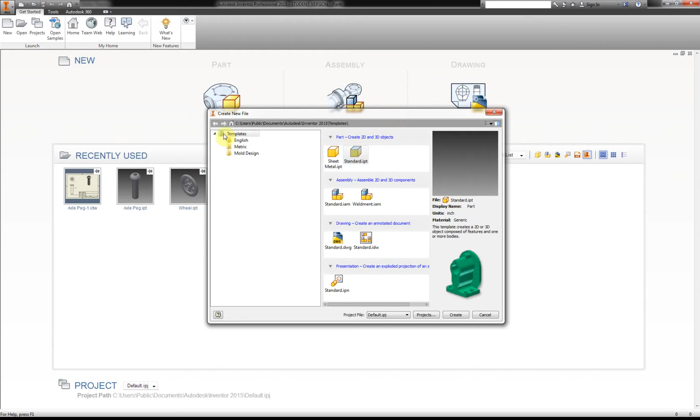So what we're going to do first is make a shape that we're going to be cutting all of our other features out of. So in Autodesk, make sure you have a standard part file, a new standard part file. And we're going to start our 2D sketch on the YZ plane.

And we're going to add in a rectangle. I'm going to use a 2-point center rectangle because I want it to be centered on this.

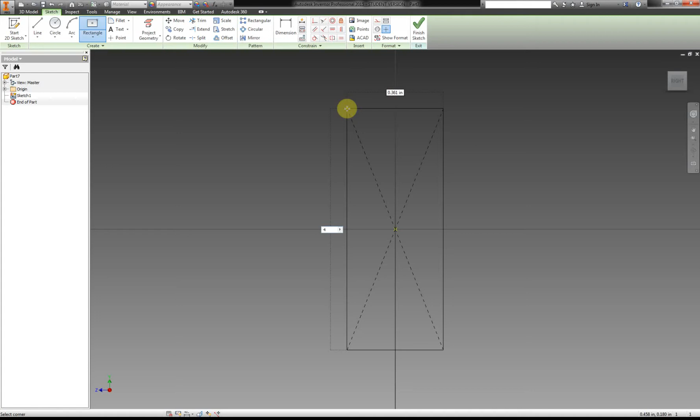So for the height, I'm just going to add in 4 inches. And then for the width, I want it to be 2 inches because that's the exact dimension. Alright, so our width right here, and our height, I just put something in as a placeholder because we're going to be making this arc right here.

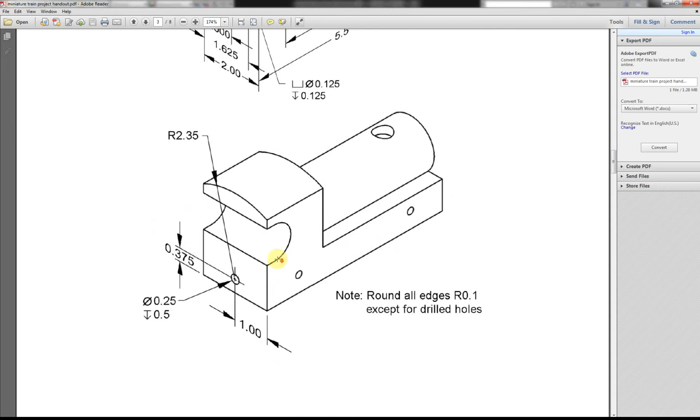So we're going to place an arc, and I'm going to use the center point one because I want the center point to line up in the middle here, to there. And just to double check that it's in the center.

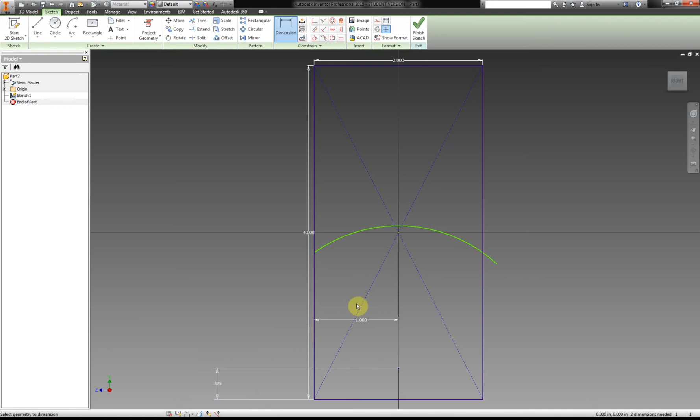And from the bottom, we want it to be - let me just double check that number - yep, 0.375 inches from the bottom. And we want the radius for our arc to be 2.35.

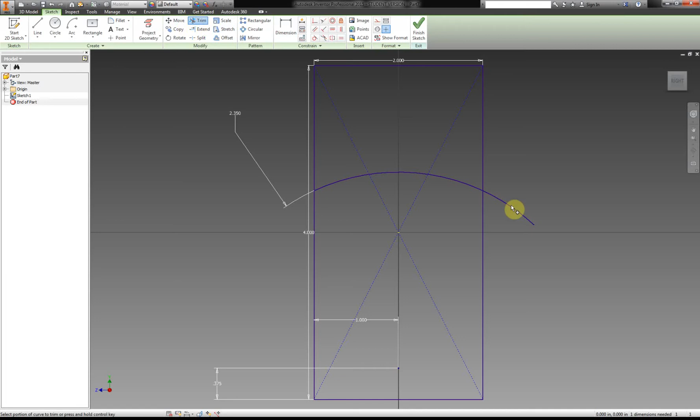Alright, so we can see here that it kind of extended off to the side, so we can just use the trim tool and trim that up. So we can see here that 4 inches was more than we needed for our rectangle. So we can finish our sketch.

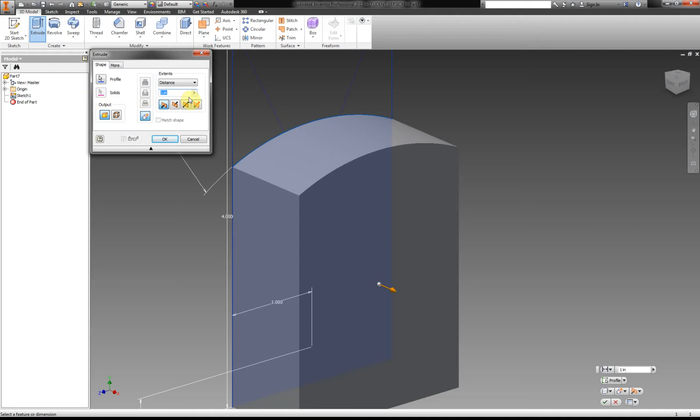And we can extrude this section. For this section, I'm going to have it be 5.5 minus - actually, nope, it's just 1.75, because we just want this one section right here. So if we just follow the line down, 1.75.

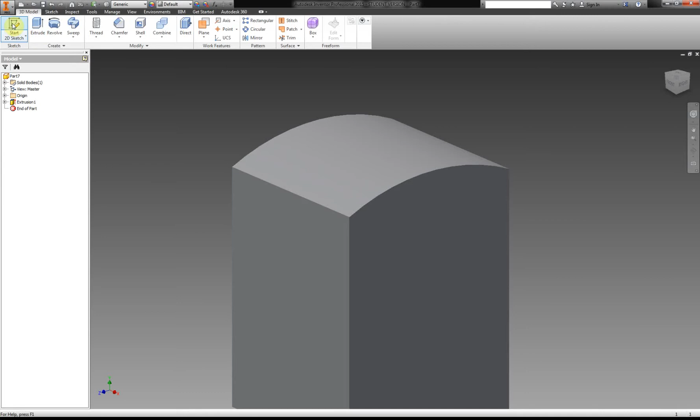Our next sketch we're going to place right on this surface here, and you need to make sure that you use project geometry, and we're going to use a rectangle. This time we're going to use the 2-point rectangle. Make sure you click on this bottom edge right here and then click on this edge right here.

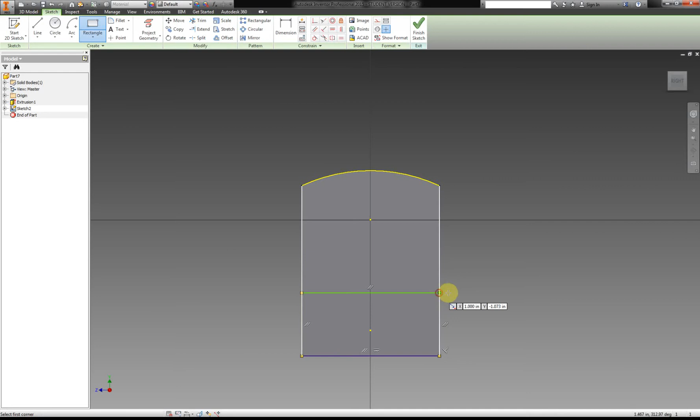So the height of this is going to be 0.88. If we follow the line out, yep, 0.88. Then we need a circle that's going to be on top, right in the center, so it's 1 inch away from there, and it's going to be 1.38 from the bottom.

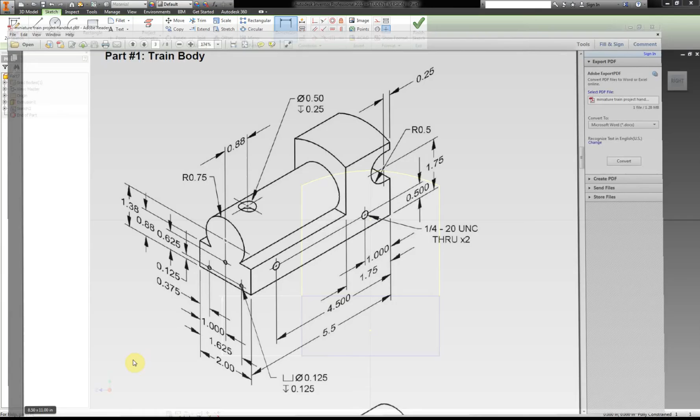So our circle tool - 1.38 - and from the edge, it's just 1 inch. And our radius is 0.75, so we're going to need to double that, so times 2. Yep, so we have 0.75 times 2, so now we have 1.5.

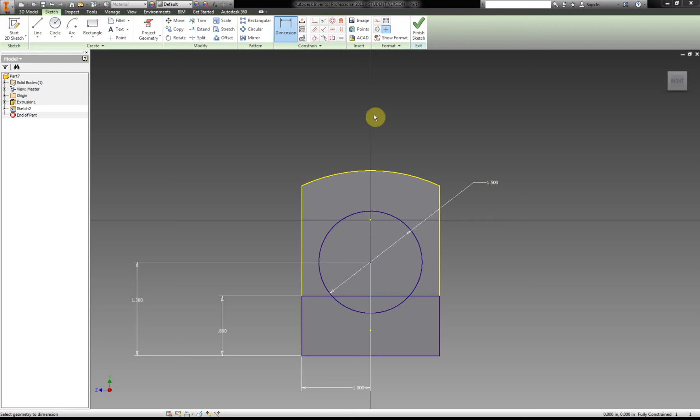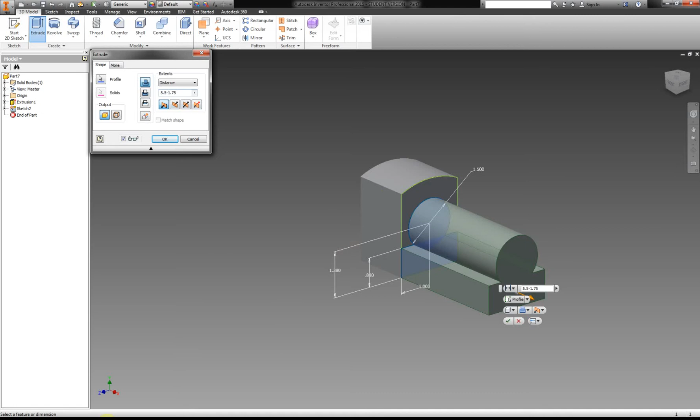So we can finish our sketch and extrude. Make sure you click on both sections before you change the distance, because sometimes it will only select the second part of it if you do that. So 5.5 minus 1.75 for this section, and then okay. So that was just this section right here, because it doesn't give us the exact dimension, but we do know the total length of it is 5.5 and then minus the length that's right here.

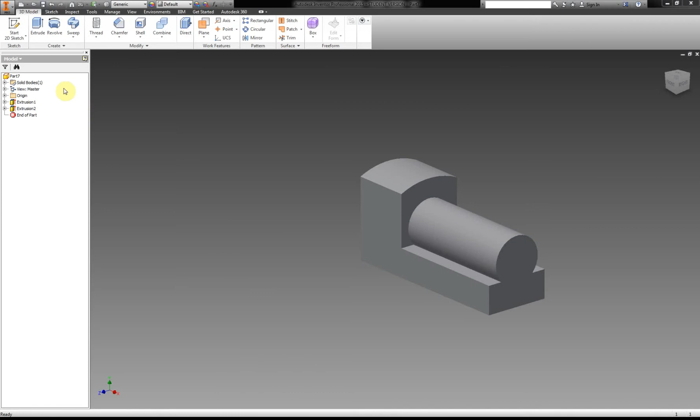So for our next part, we can cut out this section. So if we start a sketch right here, make sure you project geometry.

All right, remember the home button on your keyboard will zoom in and out for your entire object, just so it fills your screen.

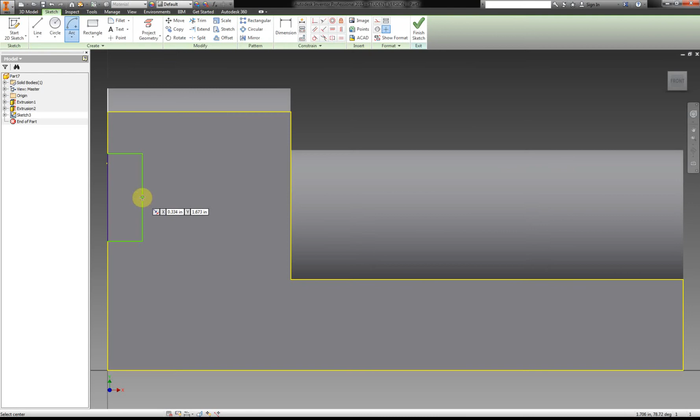I'm going to place a rectangle using the 2-point rectangle, placing the edge here, and then kind of place it here. Then I'm going to use the center point arc because I want the center of the arc right in the center. Yep, see that little green dot? That's what you want to see. The center of this one, so you want the green dot, right there, and then, yep, green dot, right there.

Okay, so now to find our dimensions, we know that we want a radius of 1/2 inch, and our radius from the edge is going to be 1/4 inch.

So that rectangle you want to be 1/4 inch for its width. And then we need to know the location of where this center mark is, or our center point is, to the bottom. So from here to here, we need to figure out that dimension. And if we look over here, we can see it is 1.75.

And I actually got really close. Okay, so now we can finish our sketch and extrude. Remember, you've got to click on both sections first and change your distance to all, making sure it's cutting through your entire object.

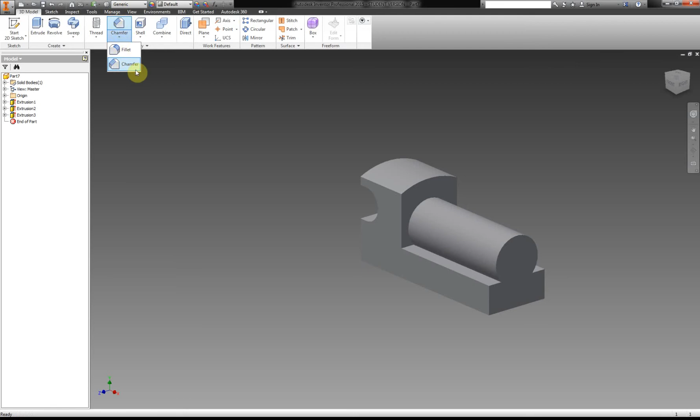So right now we have all of the different features added except for all of the holes. So right now is the best time to add in your rounds and fillets. Remember, the fillet tool, if you just used the chamfer recently, is underneath there.

And for this one, we have round all edges to a radius of 0.1. So except for drilled holes, that's why we're doing it beforehand, because then we can use the all rounds and get them all at the same time.

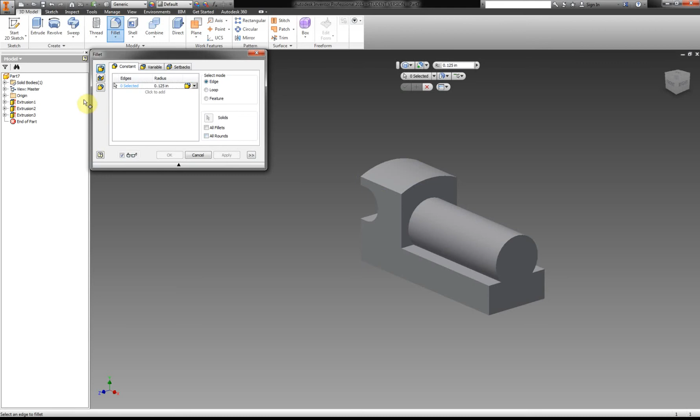So if we just change this to 0.1, select all rounds, now it selects all of them. And then if you want to, you can select all fillets. I think it looks a little bit better adding that in, but you don't have to. Just make sure that you do have all rounds added, and then you can click OK.

So that gets all of this done all in one step, so you're not just clicking on all of the different edges to add the fillets in. And also when you do something like that, sometimes the fillets can look a little weird, like right here. Sometimes you'll get a point, even if you do add in the fillets everywhere. It's just because of how they layer.

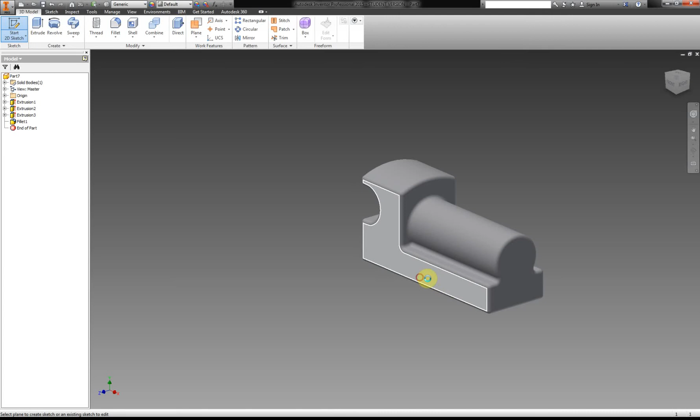So the next thing we're going to do is add in holes for our axle peg right here. We're going to have one hole here and one hole here. So we're going to add in points, and also make sure you project geometry from this outside edge.

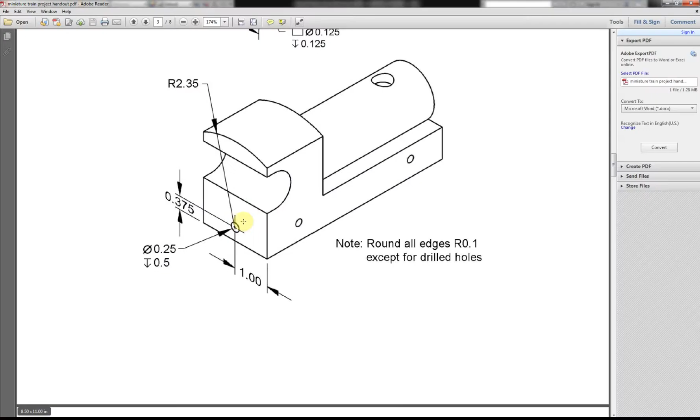Remember, when you're dimensioning, you're doing it from the outside edge, not from this inside surface, because when we go back to our drawing of our object, we're going from the sharp edges right here. We just wanted to round all of the edges earlier just because it makes it a little bit simpler for us. So what we want is from this back end, this one's going to be 1 inch, and this one's going to be 4.5 inches.

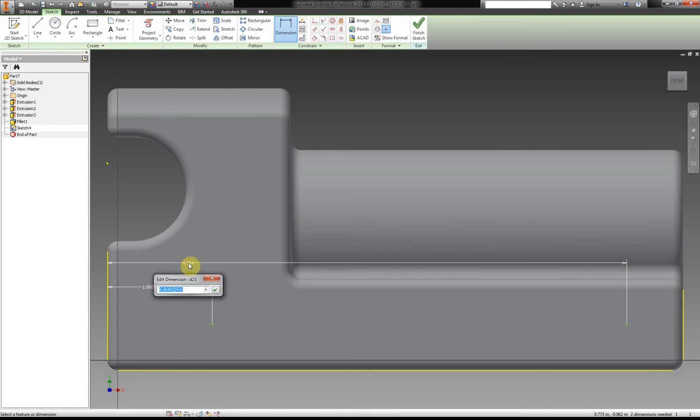So that one is 1 inch, and from here to here, 4.5. And the height of these, if we follow this line out, is 1/2 inch for both of these.

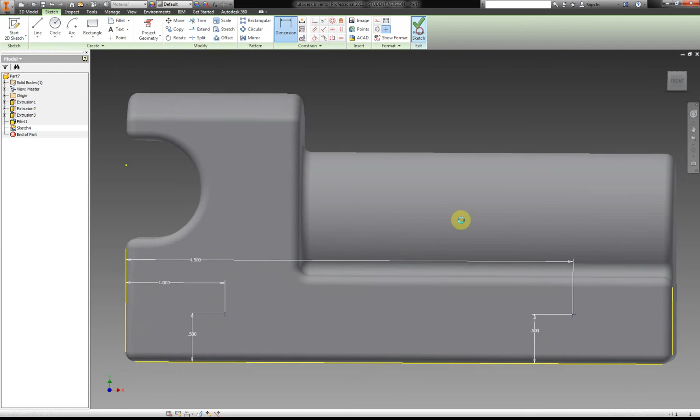So the reason why we want to do just points is so we can use our hole tool. Remember, if you used thread recently, it's underneath thread. So it finds both of those, and we want to make sure the distance is through all.

We want to make sure that we select the thread, and also make sure the depth is at full depth. If you haven't used this recently, it will most likely be unchecked, and this is what it's going to look like, and it won't show the thread going to the full depth. That's the representation of thread. So thread to full depth.

And you're going to make sure it's 1/4 inch, 20 threads per inch, and coarse thread. So we have 1/4 inch, 20 threads per inch, and coarse thread. Then you can just click OK. The next one we're going to do is the holes for the Cowcatcher.

So again, you're going to project geometry to the outside edge, not just this face right here. We're going to need 3 points, so I'm just going to place them anywhere for right now. Just make sure they don't link up to anything so you can move them around freely.

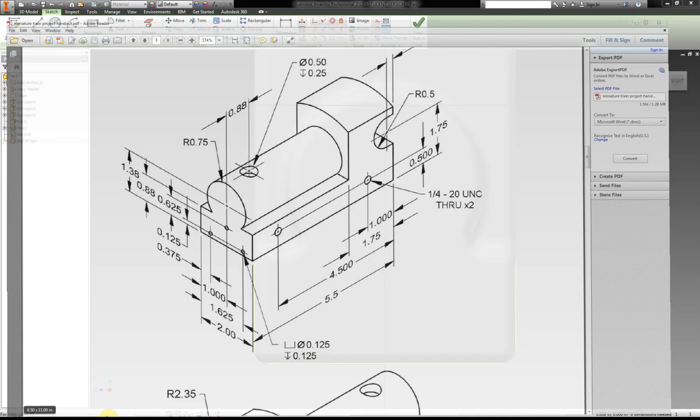So looking here, I know there's a lot of lines and sometimes it gets a little confusing, but if you just follow the lines out, so I want the height of both of these, follow it out. So that is 0.125. Remember that's from the very bottom edge, so it's going to look like they're right on the edge of the fillet, or the round, and that's where they should line up.

Okay, and now for this one, this is going to be 1 inch from this edge, and this one's going to be 0.625 for the height.

Alright, so for here, for this one, if we follow this line down, we have 0.375. Then our next one, if we follow the line down, we have 1.625.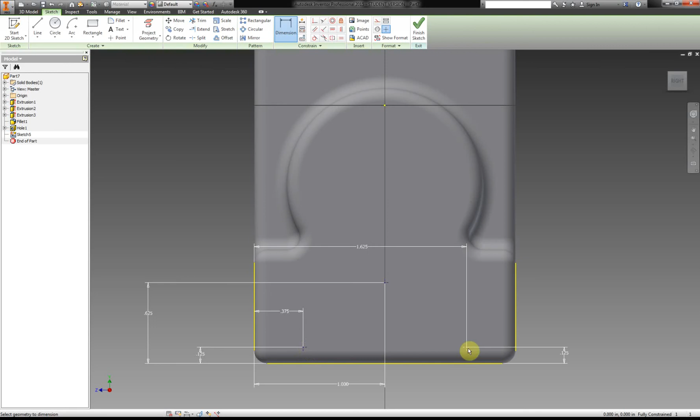So now all of these are blue, so we know we have all of these constrained. You can finish your sketch, use the hole tool. So these we're not having all through, they're going to be at a distance, and they should not be threaded.

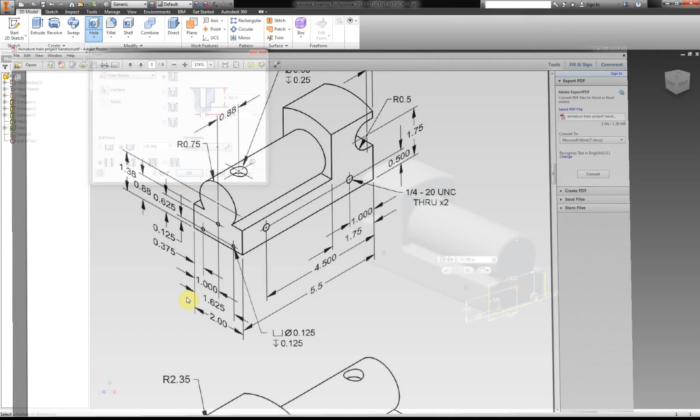So if we look here, here's the symbol that you normally see for counterbore, but this is also used for just a flat bottom in the hole. So the diameter is 0.125 and our depth is the same. And for our tool right here, if you look, we have a point and we also have flat bottom for the drill point. So you can just check or fill in the little dot for flat, and then OK.

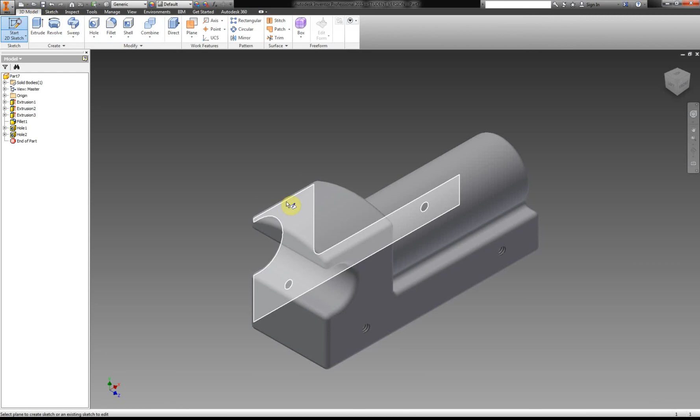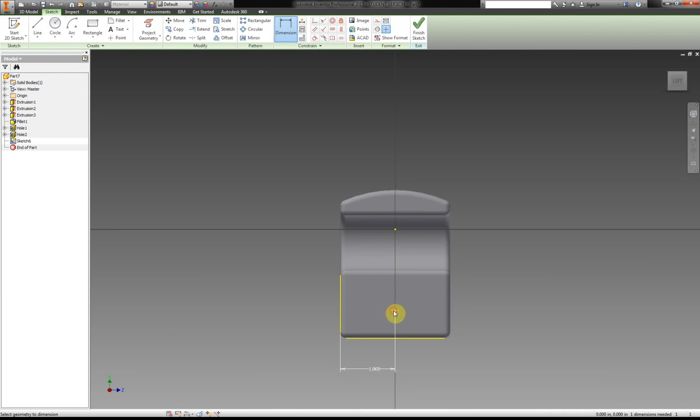Now we're going to add in the hole for the hitch magnet and hitch peg to be attached. So for these, again, we're going to project geometry to the outside edge. We're going to place a point. This point, we know it needs to be in the center, so 1 inch. And then from the bottom, it is 0.375. Okay, and it's blue, so we know it's constrained.

Now we can use our hole tool. And our diameter is 1/4 inch and our depth is 1/2 inch.

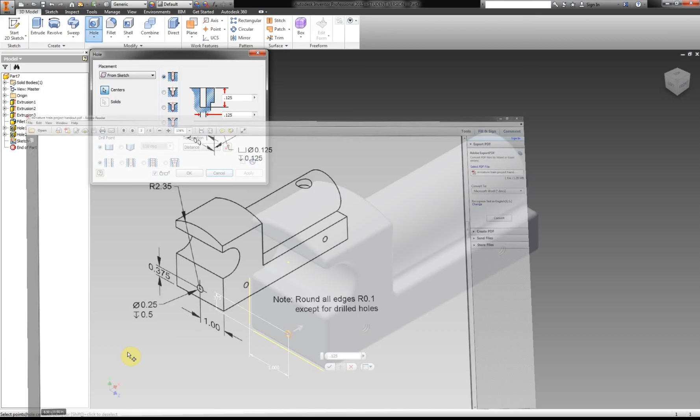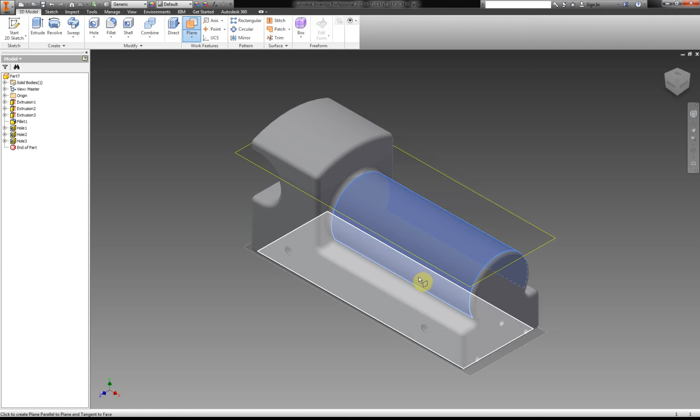And the last hole that we need to add to this is the one for the stack. So this one's a little bit trickier to add because it's not to a flat surface, it's to a curved surface. So we're going to need to add in a plane. So first click on your plane, and then click on your second surface to line up your plane.

And now we can start a sketch. If you click on the plane, it kind of clicks through, but if you click the edge of it, it highlights your work plane.

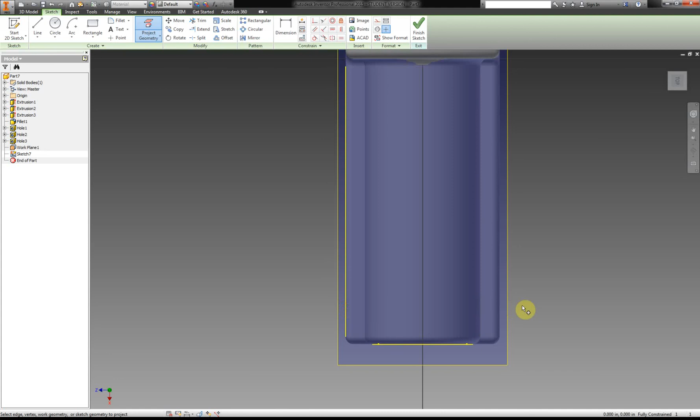So for this one, you want to make sure again, project geometry to the outside edges, the very outside. We are going to add in a point. This one is going to be in the center, so 1 inch. And then from this edge, it will be 0.88.

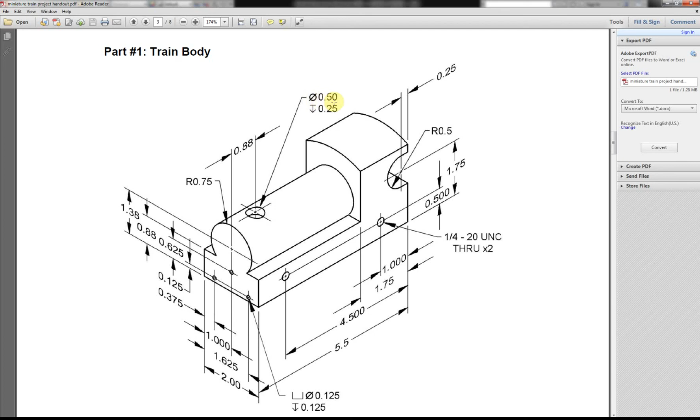Yep, 0.88. Okay, and then it's going to have a diameter of 1/2 inch and a depth of 1/4 inch. So we can finish our sketch, use the hole tool. So we have a 1/4 inch and a 1/2 inch, and then we can click OK.

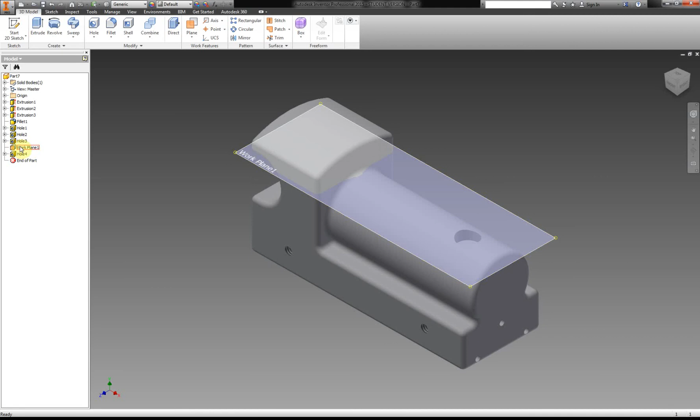So now we have this work plane, but we don't want it visible. So over here on your browser, you can right click, and uncheck visibility. And here is your train body.